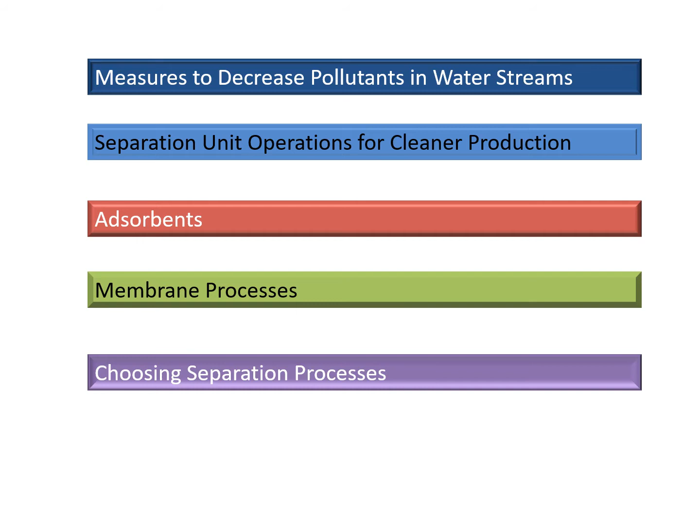Starting with the first headline, water streams - how we can reduce the load in our water streams. Ultimately, any kind of effluent, once disposed into the environment, is going to lead to our water bodies, to the drains, into the rivers, canals, wherever we have linked them. And even if you consider treatment plants, we are still collecting it as sludge, and that sludge is again disposed openly. So in one way or the other, the contaminant is there.

We need to address this. There is a range of strategies available which we need to focus on - how we can address this issue, how we can actually reduce and decrease the pollutant in our water streams. So please have a look at it.

First of all, we can have a change of raw material and support material chemicals. This is most beneficial because our main source of pollutant is the chemical used as raw material, which is not consumed within the process but disposed as a byproduct, an unwanted waste which continues to exist in the system and create problems. Supporting chemicals are also problematic. How good it could be if we can replace these materials - raw materials and supporting chemicals - we can have some alternatives.

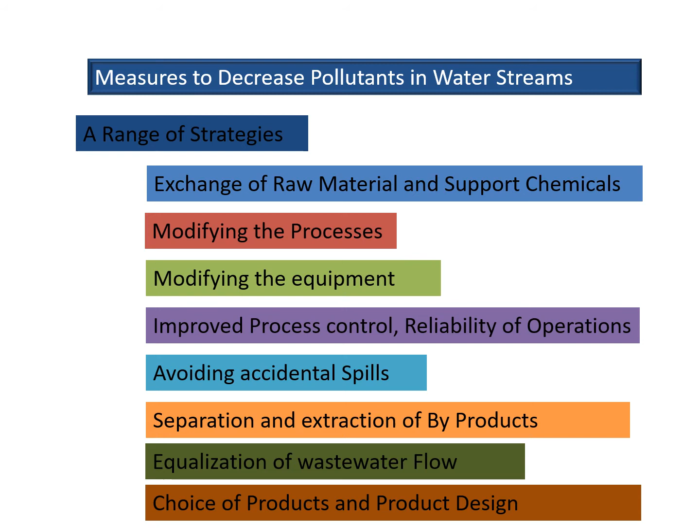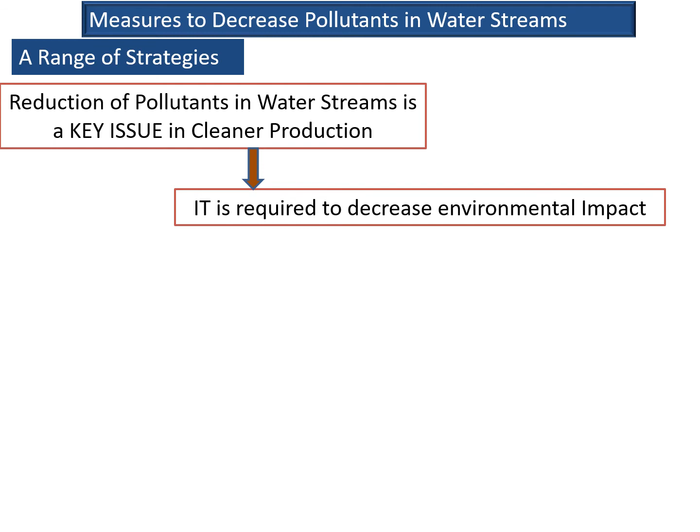Now again talking about the range - reduction of pollutants in the water stream is the target, and it is required to reduce the impact. Then recirculation of water, particularly process water, to reduce the byproducts and save input resources. The long-term goal is to eliminate or reduce pollutants as much as possible, and lower the amount of produced pollutants, and by reducing the raw material also lead to savings.

We will require lesser resource material, lesser water volume, and lesser need for treatment if we obtain our goal: reduce water flows, reduce water consumption, and decrease water pollution release. This was the target which we talked about earlier.

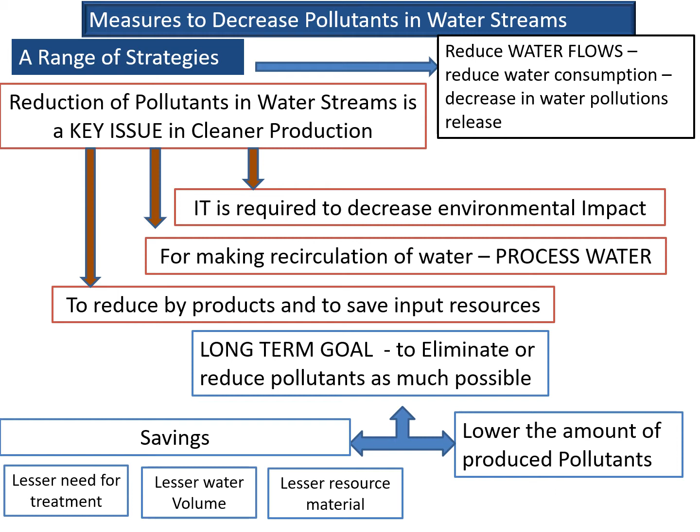This is something about the exchange of raw material and support chemicals to trace the origin of pollutants. We need to find out what's the origin of the pollutants, from where they are coming. For example, if there is chromium in our drain, canal or river, let's trace it back from where it is coming - is there a leather industry, tanning industry, or electroplating industry from where this chromium is coming?

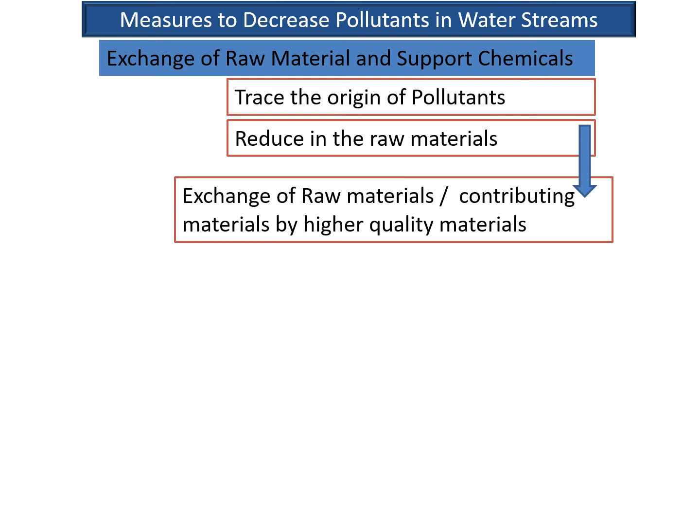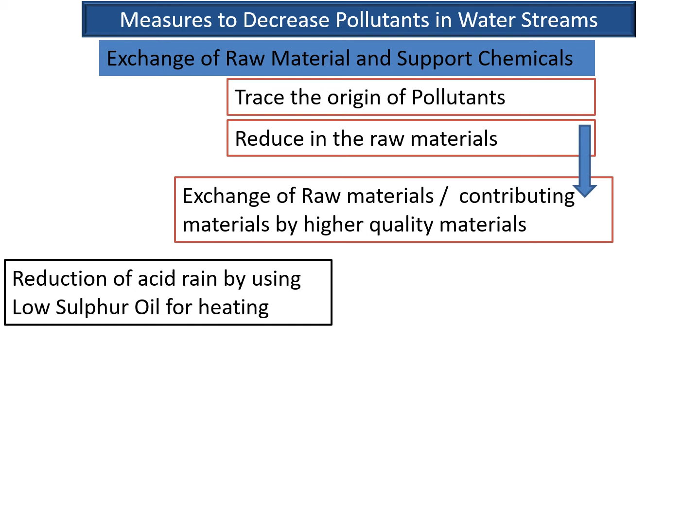Reduction in raw material, as we talked - there is an option that we should focus on reducing raw material consumption, and it can lead to exchange of contributing materials with higher quality materials, and reduction of acid rain by using low sulfur oil for heating. This is one of the possibilities to achieve our goal.

For example, the chlorine-based bleaching process in the paper and pulp industry results in the release of toxic chlorinated hydrocarbons. It can be exchanged with other bleaching chemicals like oxygen, chlorine dioxide, or ozone, hydrogen peroxide used in combination. There can be different combinations, but this is one option for how we can get rid of chlorine usage in the bleaching process, which is resulting in the release of toxic chlorinated hydrocarbons. You can go through it in detail and find how this is going to help the paper and pulp industry.

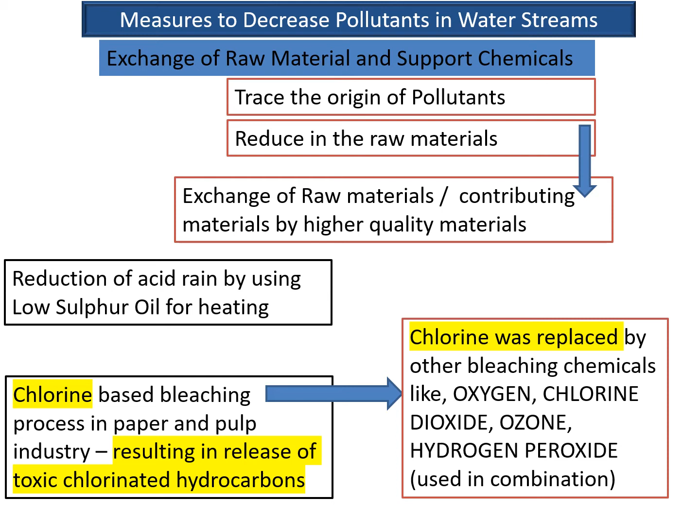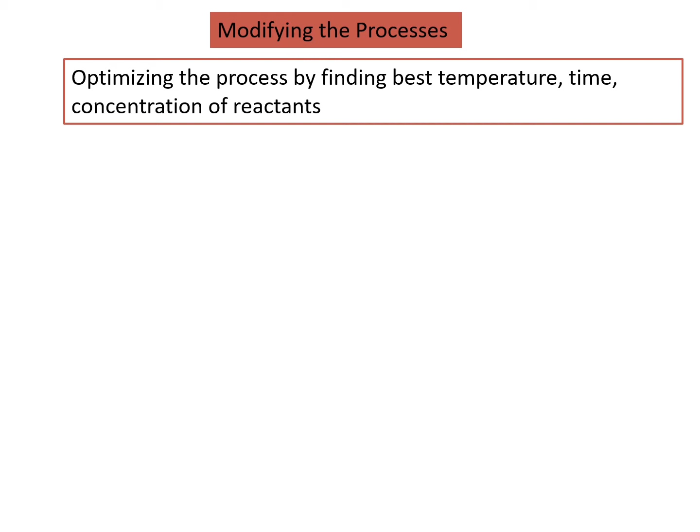Modifying the process is one of the options - optimizing the process by finding the best temperature, time, and concentration of reactants. The process has some requirements like temperature, oxygen, and other chemical characterizations. If we get a more optimized process and are concerned about these parameters, we only focus on obtaining them. So install equipment for process control, through online measurement of components in the process and proper feedback mechanism.

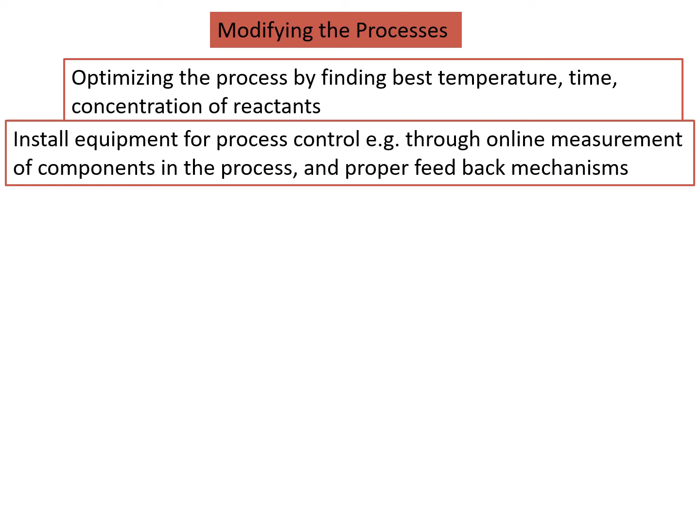There are different other means by which we can achieve it - altering the reaction time, temperature, pressure, chemical environment in the process, increasing the yield through improved technology, installing internal cleaning steps for separation of pollutants from the process, recovering input chemicals and recirculating them back to the process, reusing input chemicals for purposes with lower quality demand, improving the handling of raw storage, and changing the process to an entirely new way of manufacturing the product.

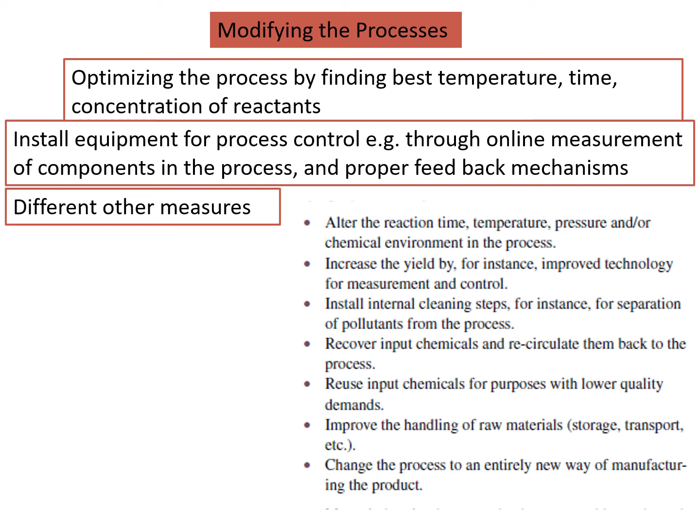So these are the options for how we can modify the process. What we will get may be, in some cases, a completely different product, or maybe better optimization. These are the possibilities.

This is another example, like in the textile chain, where we are normally disposing highly polluted waste from these processes. Starch had traditionally been used as a sizing agent for weaving, and this starch, after hydrolysis removal, was the source of 30 to 50% of emissions of oxygen-demanding matter.

BOD and COD levels in all wastewater are higher because of the use of starch, which is used for sizing in different textile processes. As BOD and COD levels increase, the industry began to express interest in cellulose-based sizing agents, which would exhibit little or no BOD or toxic effects in recipients.

So this is a change through modification in the process. We are completely changing the process of desizing, sizing, kiering, and dyeing. All these processes will change when we change the basic product used in this process.

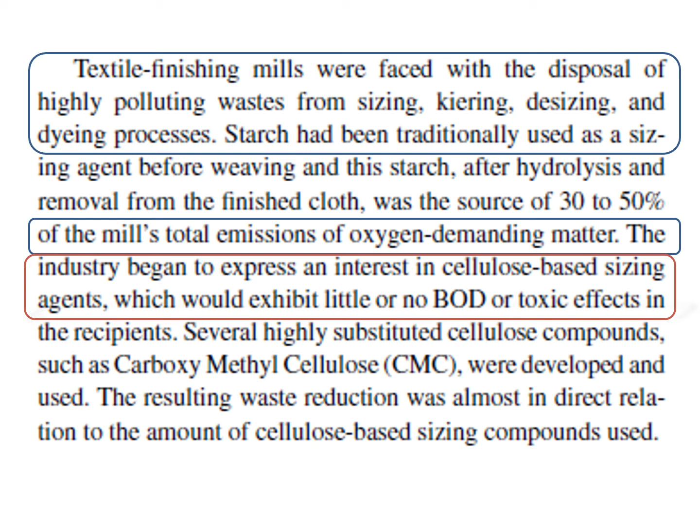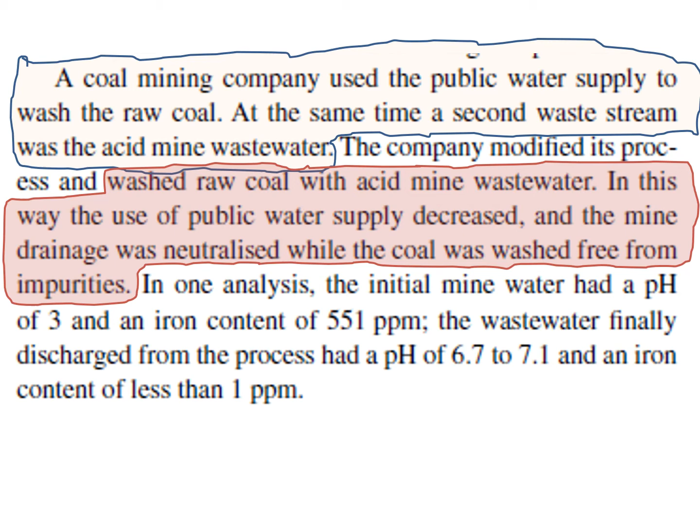Now, modification in the equipment. Optimizing and modernizing equipment helps reduce the amount of pollutants. This can be in the form of filters or mechanical devices for separation of waste from a stream.

An example from the food industry: fragments of different foods and vegetables, like cucumbers, were disposed of along with the waste stream. So we added a screen, and because of screening over the drain lines, most food waste was not allowed to escape with the effluent into water bodies. We separated the solid food waste and disposed of it separately, which reduced the waste load in the waste stream drains.

In a poultry plant, pieces of feather and fat were found in the wastewater, so traps on the discharge pipelines helped remove these waste products for separate disposal. Similarly, removal of fibers from wastewater streams in factories by adding filters is another example of modifying equipment.

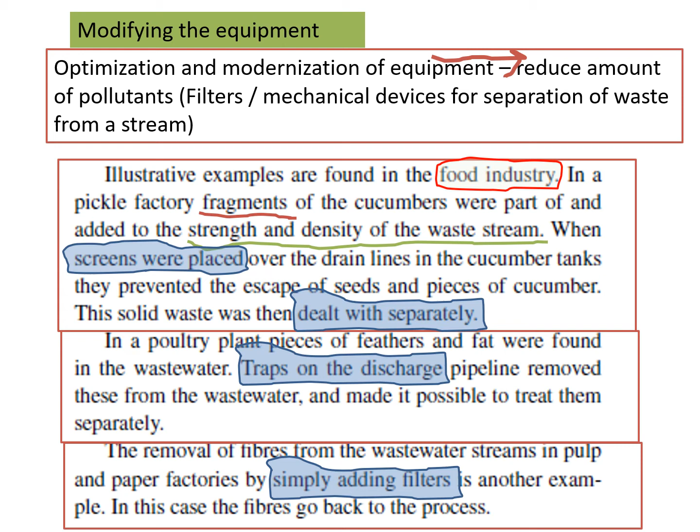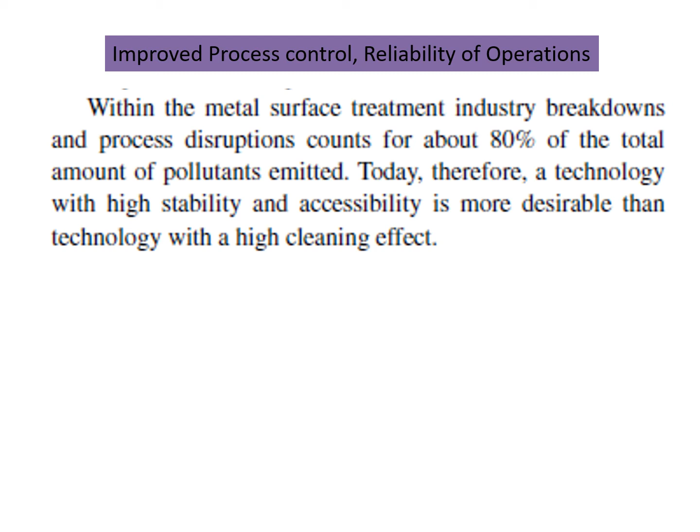Now, improved process control and reliability of operations. Within the metal surface treatment industry, breakdowns and process disruptions account for about 80% of total pollutants emitted. If we properly control the process, maintain the electric supply, and maintain monitoring, we do not allow emissions to be produced, and we obtain much more stability in the effluent.

Now, avoiding accidental spills. When there isn't proper maintenance and there are operational mismanagement issues, most of the waste leaks out and is disposed of at wrong places where it cannot be properly collected, recirculated, processed, or treated. Wastewater ends up remaining where it should not be present, and we waste the flow because of this mismanagement.

Many accidental discharges are usually small in volume and go unobserved. One needs to pay special attention to them, even though it is almost impossible to prevent every potential accident from occurring. There are measures that can be taken to reduce the likelihood of accidents and their severity if they occur.

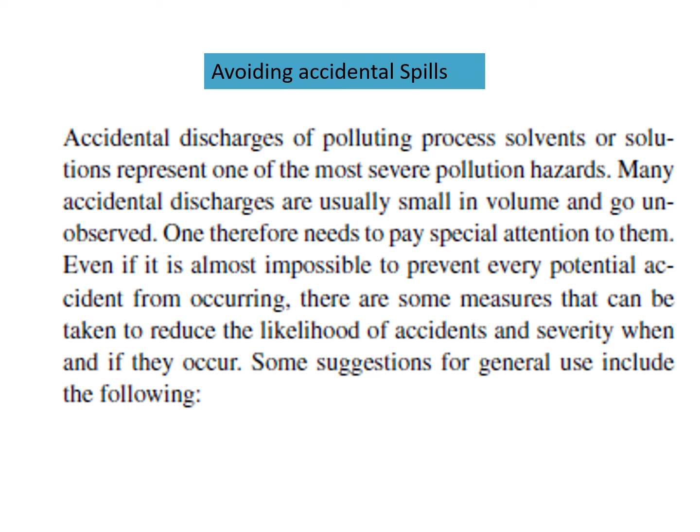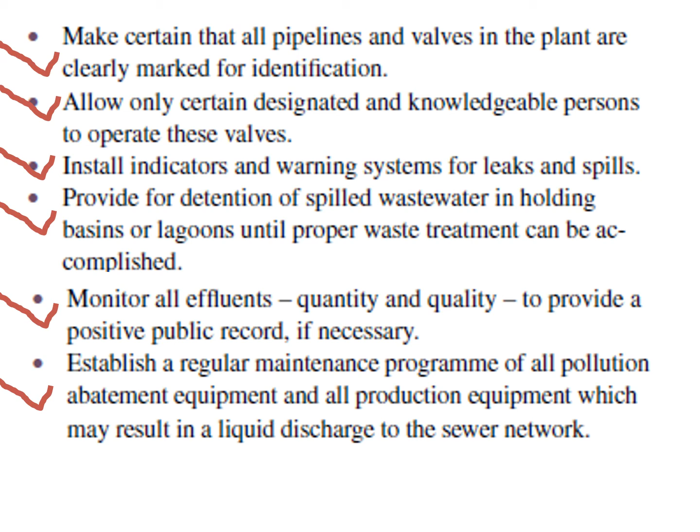Some suggestions: make certain all pipelines are clearly marked for identification. Allow only certain designated and skilled persons to operate. Install indicators and warning systems for leaks and spills. Provide for detention of spilled wastewater in holding basins or lagoons until proper treatment can be accomplished. Monitor all effluent quantity and quality to provide a positive public record. If necessary, establish a regular maintenance program for all pollution treatment equipment and production equipment that may result in liquid discharge to the sewer networks.

Now, separation and extraction of byproducts. There is a lot of room and space in these processes. We have different options based on the nature of the wastewater and the kinds of pollutants present, so we can adopt different techniques. Wastewater treatment cost can be reduced by keeping different kinds of wastewater separate, as we discussed earlier—if different sources of wastewater are separated, we need different kinds of treatment, and sometimes we may not even need treatment at all if we separate wastewater coming from different sources.

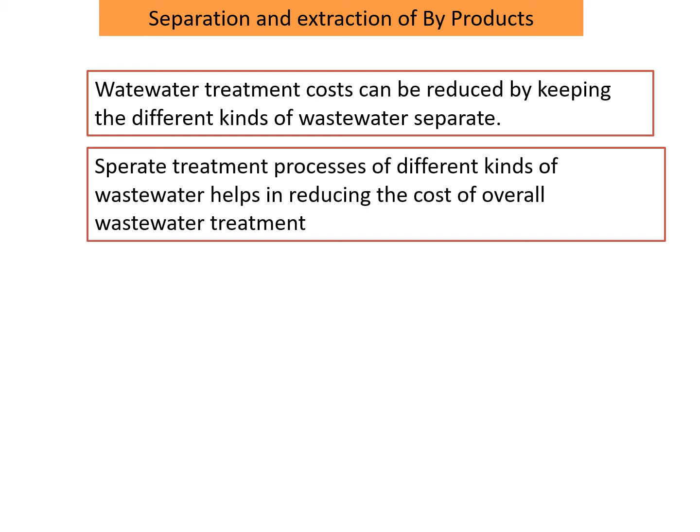Separate treatment processes for different kinds of wastewater help in reducing the cost of treatment. It's obvious—simple treatment techniques and extraction processes can be adopted.

One simple example is from the metallurgy industry. The metal plating industry uses ion exchangers to recover phosphoric acid, copper, nickel, and chromium from plating solutions. The deionized water from the ion exchangers, without any further treatment, is ideal for boiler feed requirements.

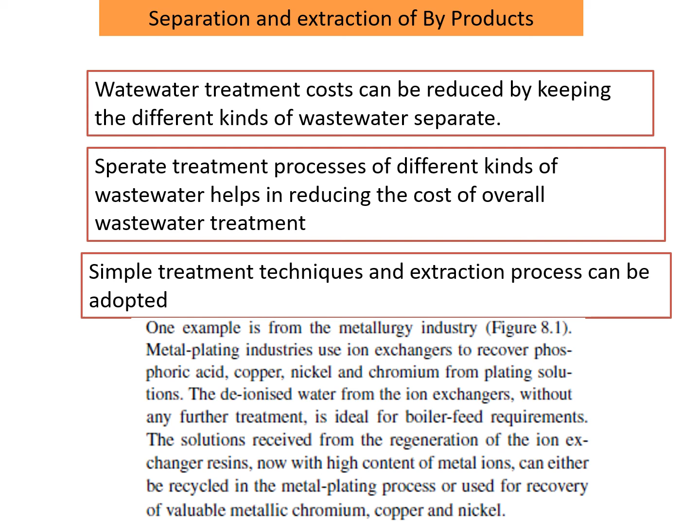Solutions received from the regeneration of the ion exchanger resins, now with high content of metal ions, can either be recycled in the metal plating process or used for recovery of valuable metals like nickel. So we are also interested in recovering valuable metallic compounds such as chromium, copper, and nickel, and these recovered materials will again be used as raw input material. So this is the example.

Equalization of wastewater flow is a very simple and interesting feature. Industries with several products from different processes often prefer to level out their wastewater. This means that the wastewater is collected in a surge tank during a certain period, depending on the turnaround time for the different processes in the industry.

For instance, if a product is produced in a number of steps taking a total of 8 hours, the surge tank must have a residence time of at least 8 hours. The wastewater flow from this tank will have more even composition and characteristics compared to the inflow to the tank.

The goal with leveling out the wastewater is to achieve stabilization of, among other things, pH and BOD in wastewater. At the same time, the tank also serves as a sedimentation tank for separation of particles. Stabilized wastewater can be treated more readily and efficiently in industrial and municipal cleaning plants. So in some cases, leveling will make other treatments unnecessary—this is the case, for instance, if pH varies heavily with time.

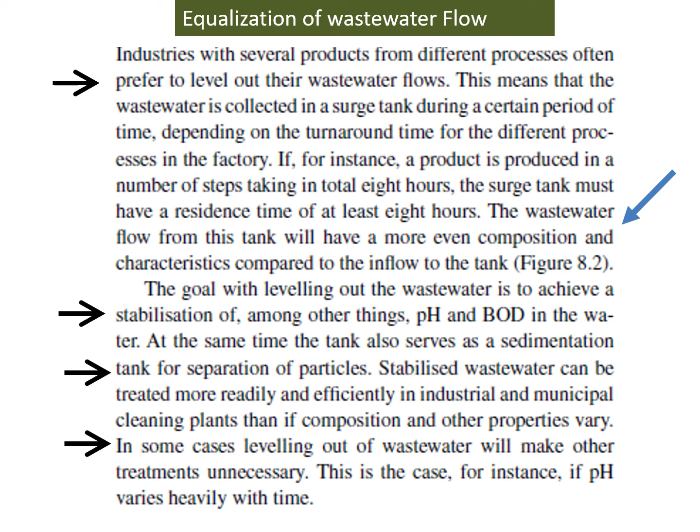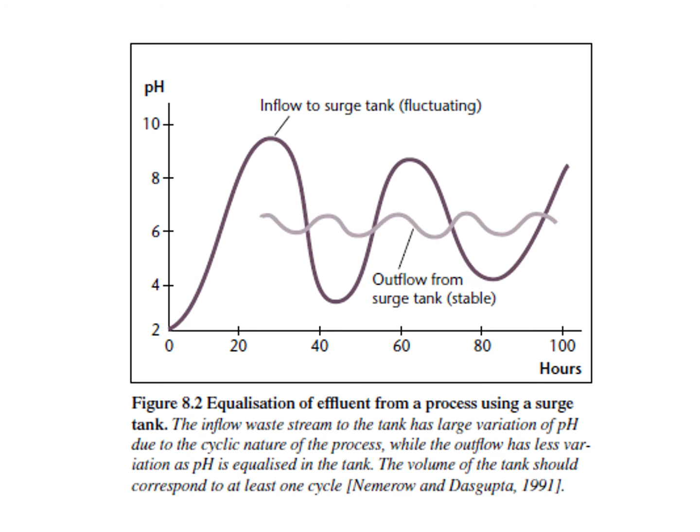...have been one solution. For example, cadmium containing paints were outlawed at some point, replaced by other paints. So this kind of modification in product can be adopted in cases when it seems difficult to modify the product.

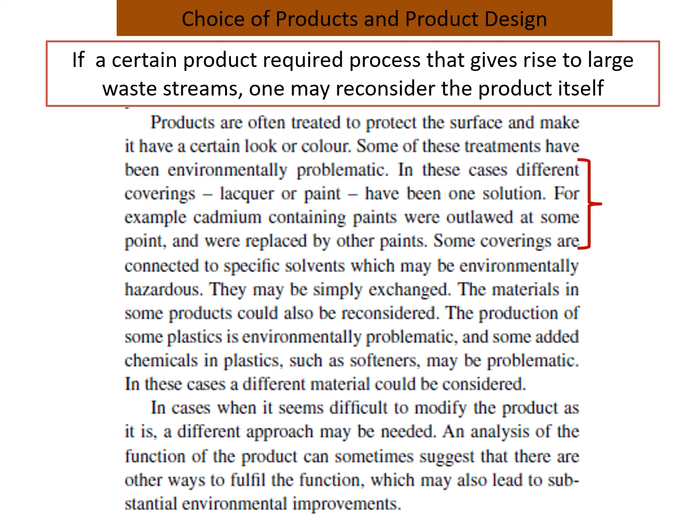Then a different approach may be needed, and analysis of the function of the product can sometimes suggest that there are other ways to fulfill the function. So now we have some separation unit operations for cleaner production.

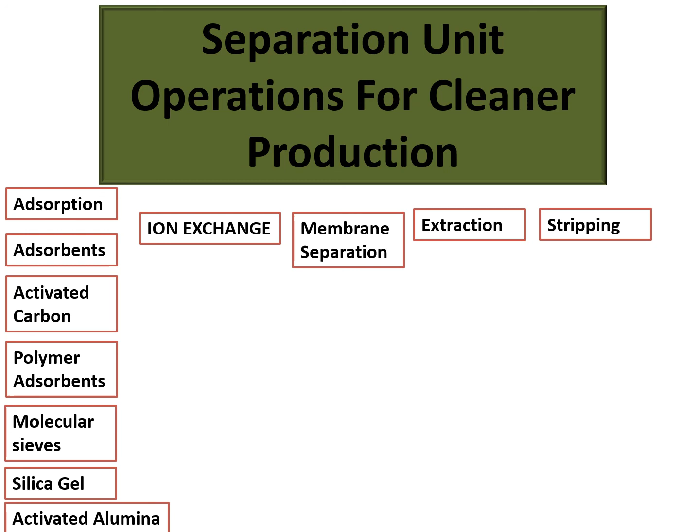And then in this we can go further: choosing separation process, treatment process for different water streams. Which method is right - column or batch separation? So these are the techniques that we have to adopt, and how we will adopt them.

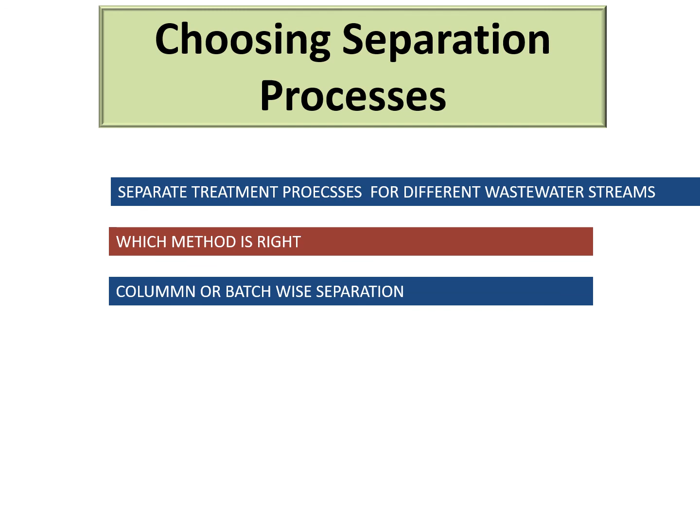Now we are going to choose the separation process, and we will study it under three headings: separation treatment process for different wastewater streams. So for this, more sophisticated adsorption methods are used for processed water, where the volumes may not be so large and the value of recycling water is high because of the components used in the process. So there are different approaches which we can adopt depending upon the nature of wastewater.

So in this case we are talking about the processed water. For that we can adopt a more sophisticated adsorption method, because the volume of water will not be very large, and the value of recycling is high, so we can get a finer quality of water. For that, a finer, sophisticated adsorption method can be adopted.

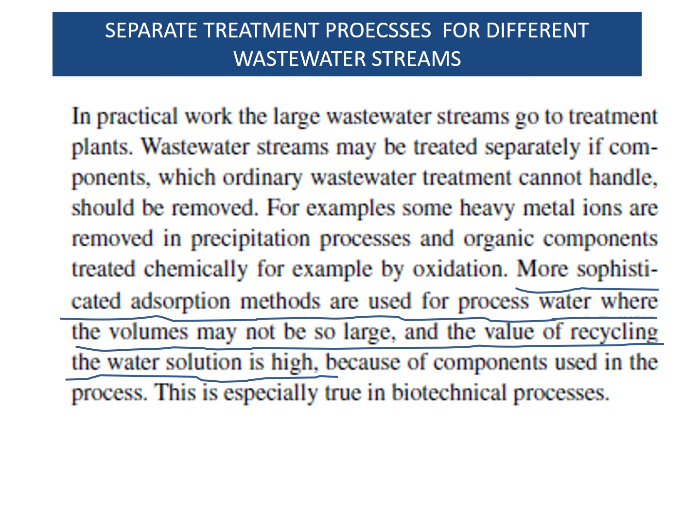Which method is right? The property of the substance to be removed is the thumb rule to define the method. So adsorption with activated carbon used as a polishing step is excellent for separation of organic compounds at low concentration. So at low concentration, we can adopt activated carbon.

Adsorption with polymer adsorbents is used for recovery of organic compounds at higher concentrations. And then ion exchange is used for ionic substances at low concentration.

Extraction can be used for hydrophobic organic substances at high concentration. Stripping is used for separation of volatile, often non-degradable substances at low to high concentrations.

For comparatively large molecules, membrane separation is often selected. A special case is electrolysis, used for separation of ionic substances in more complex water solutions, at low to high concentration.

Please, I will request that you go through these and try to memorize them, because it's very important to know which separation method is feasible under what conditions, so that when those conditions exist, we know which technique to prefer. Please go through this thoroughly.